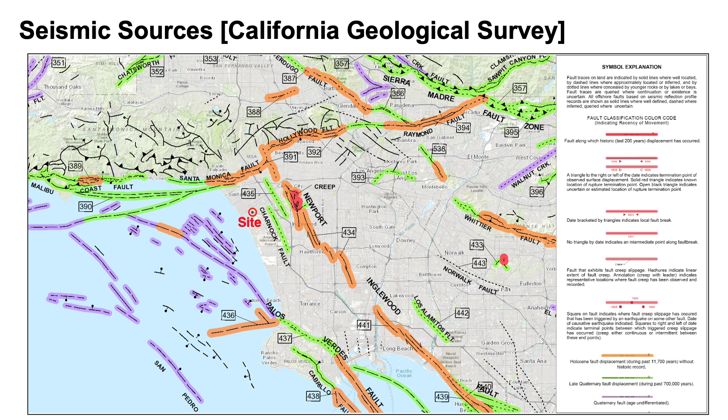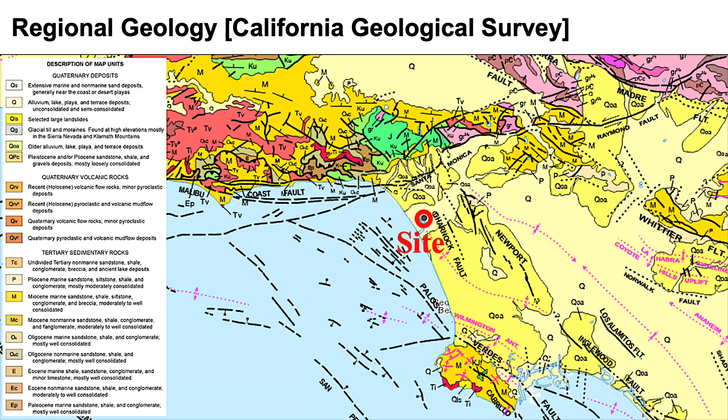This is the corresponding map of surface geologic units. The site is on Quaternary alluvium, that is to say recent soils. The groundwater table is about 20 feet below grade, but the building is supported on precast concrete driven piles. The green area around the site on the left shows that it is within a zone defined by the state of California in which liquefaction investigations are required for new construction.

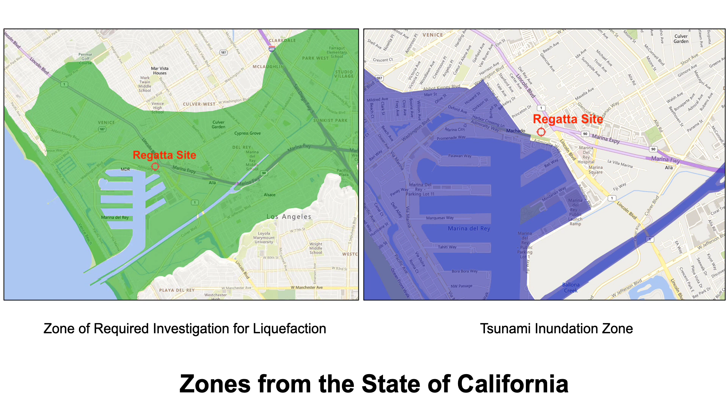Liquefaction is a soil failure in which sandy soils lose their strength when shaken strongly. The geotechnical investigation report from 1997 by the geotechnical firm Law Crandall would have identified liquefaction concerns, and that would explain the use of a pile foundation. The site is just outside of the inundation zone for tsunami, shown in the right in blue.

We use the U.S. Geological Survey to estimate the ground shaking hazards. They combine the magnitudes and probabilities for all of the possible future earthquakes based on the best current knowledge to predict levels of ground shaking for the site with its geologic conditions. Their modeling gives us a set of response spectra, as shown, where the intensity of ground shaking is given as an acceleration in G units as a function of the structural period of vibration and the recurrence interval.

We look at the ground motions basically having a 475-year recurrence interval. This is a common recurrence interval for risk or insurance corresponding to a 10% chance of exceedance in a 50-year exposure period. In other words, if I stand at the Regatta site for 50 years, the green line shows the level of shaking that won't be exceeded more than 10% of the time.

For an 18-story concrete moment frame building like this, the fundamental period of vibration is in the 2 to 2.6 second range, meaning that is the time needed to complete one vibration cycle.

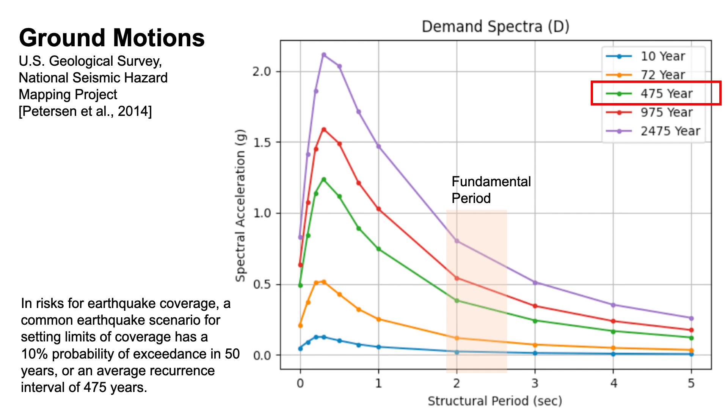This shows the structural plan of the building foundations on the left and the tower on the right. The blue tint indicates the footprint of the tower. The parking podium extends beyond the tower to the east and to the west. The foundation uses precast concrete driven piles grouped with large pile caps and linked together by tie beams.

On the right side, the red lines indicate where the reinforced concrete moment frames are located. The plan is not rectangular, so that complicates the earthquake design, requiring three-dimensional analysis. Fortunately, good tools for such analysis and design were available in the late 1990s.

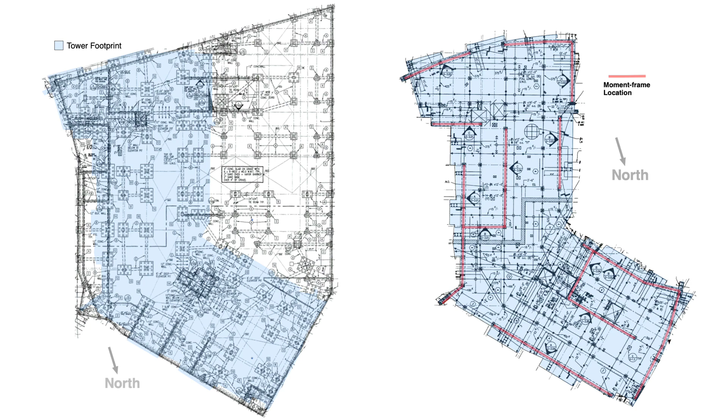On the left, we see the square piles with their reinforcement, the pile caps and tie beams, along with the slab on grade. On the right, we zoom in on a portion of the foundation plan to see pile groupings and tie beams. The system provides excellent support and mitigates the effects of liquefaction on the structure. The adjacent buildings, Cove and Azura, use thick reinforced concrete mat foundations, but this pile foundation may be a little better.

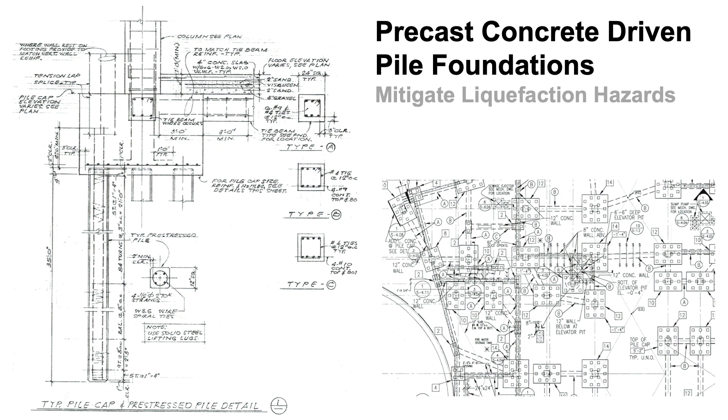On the left here, we show one of the reinforced concrete ductile moment frames stretching from the foundations all the way to the roof. We also see two seismic columns and a typical section through the post-tensioned reinforced concrete slabs used for the floors of the tower. Most frames are very regular, except, for instance, along line 17, where there's a step to accommodate ramps in the parking podium.

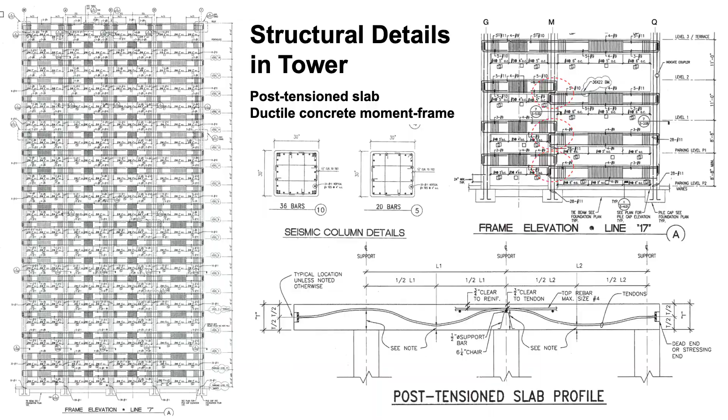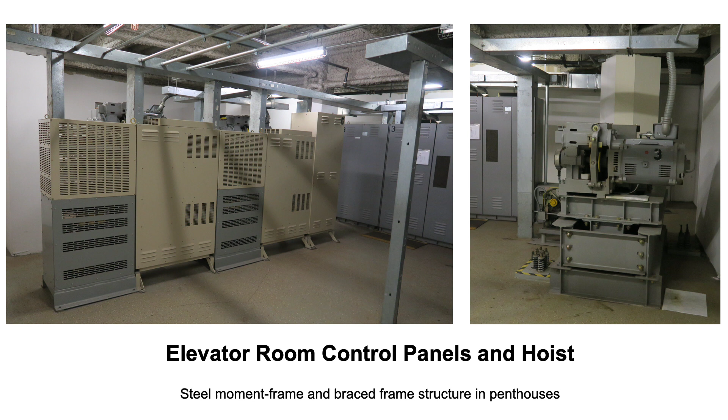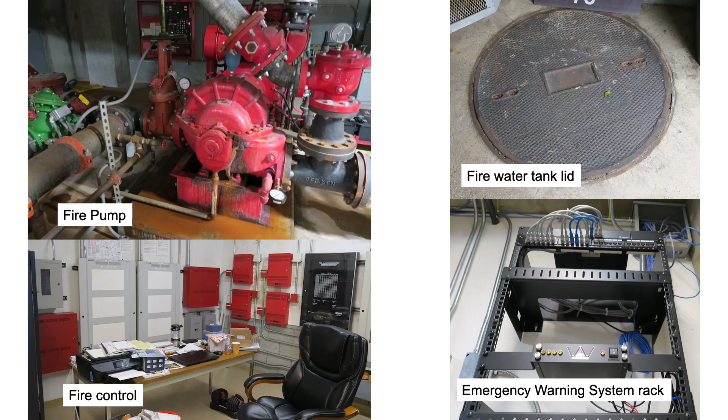The fire pump is anchored, and we see the fire control room. There's a large on-site tank storing firewater in case the city's pipelines are damaged, and you have an early warning system to provide you alerts when earthquake shaking may arrive. We note that the warning time for nearby events on the Newport Inglewood or on the Palos Verdes fault may be very, very short.

Some structural conclusions. The building has a good ductile, that means tough, structural system on a good foundation. It is well designed to recent codes and should provide good performance in future earthquakes, such as those anticipated in its design. Its performance should be similar to well-designed new buildings. Nevertheless, in large earthquakes, damage may occur.

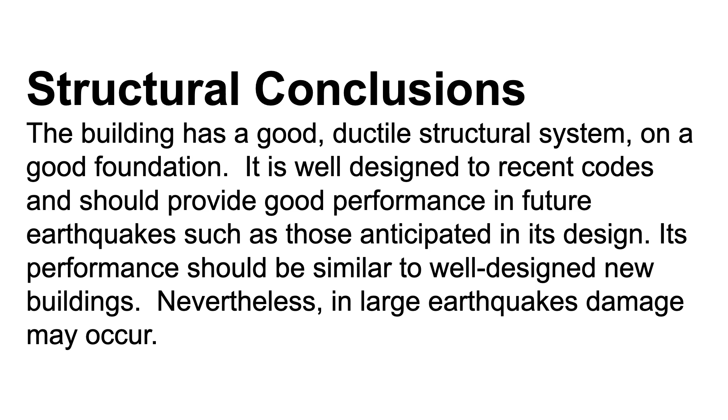Expected damage and effects. A likely scenario producing shaking, like the 475-year USGS level, might correspond to a magnitude 6.5 to magnitude 7 on the Newport Inglewood fault or the Santa Monica fault. Strong shaking might last for 30 seconds at ground level, although swaying may continue for more than a minute in the tower. Cracks would occur in drywall and in architectural ceilings, and some windows may break.

Contents and furniture would slide and tip. Tall furniture items may topple and fall. Fragile items not secured with plumber's putty or other means to braced shelves may slide and fall and break. The building may lose outside power and internet connections for days to a week or more. Cellular communications may be lost but should return within a shorter period of time.

Water and sewer system may be interrupted, in part due to liquefaction. Some damage may occur to building service equipment. Broken sprinkler lines or plumbing lines may cause some local flooding. Pool water would rise in large sloshing waves and slosh over the sides.

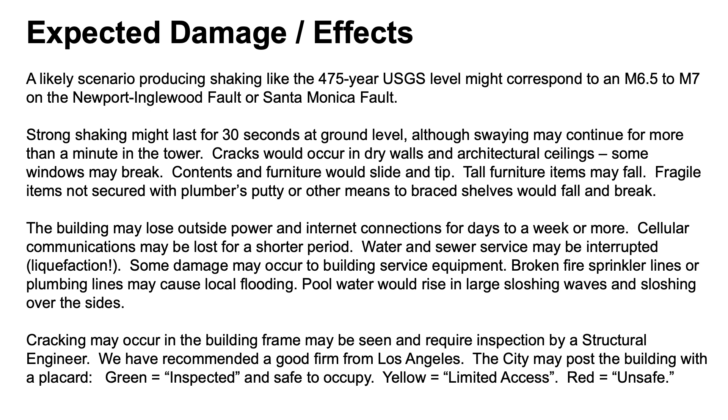Cracking may occur in the building frame and may be seen and require inspection by a structural engineer. We have recommended a good firm from Los Angeles. The city may post the building with placards, with green meaning inspected and therefore safe to occupy, yellow meaning limited access, and red meaning unsafe. Hopefully you get a green placard.

We estimated the financial risks to provide a basis for making decisions on earthquake insurance. For the 475-year earthquake, and based on a building replacement value of $240 million, which you provided, repair costs are expected to be about $29 million, or 12% of the building value. There are lots of uncertainties in play, so we estimate an upper bound to the losses may go as high as $46 million. This would not be exceeded 90% of the time.

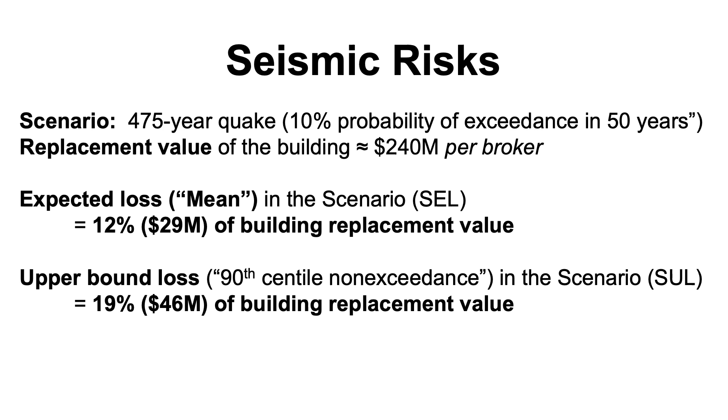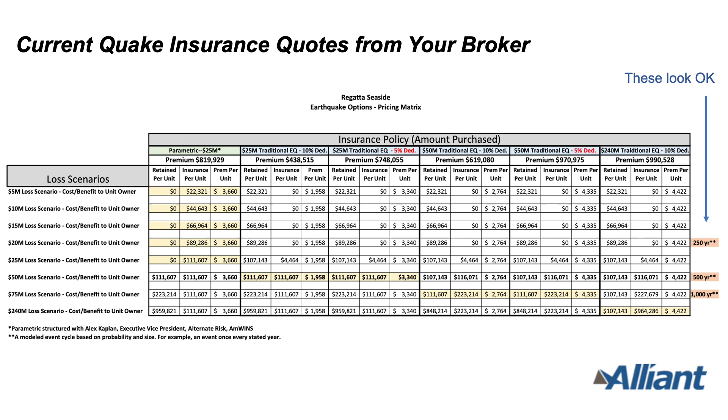Robert Sides worked with your insurance brokers and provided them information from our study. This helped them to adjust their risk models and update their policy offerings. Looking at earthquake insurance considerations, it's important to recognize that earthquake insurance is a risk-sharing mechanism. In conventional coverage, the insured party covers the deductible, that's 5 or 10% of the replacement value of the building. And then above that, the insurer steps in and covers losses up to the limit of the policy. Above that limit, the insured party again pays.

When selecting an earthquake limit that's less than 100% of the replacement value, we must consider the uncertainties. We've used a 500-year or 475-year scenario for ground shaking, and we've estimated scenario upper loss to provide a good level of conservatism, and this may be appropriate in selecting a limit. The scenario upper loss has a 90th percentile non-exceedance confidence level. Typical conventional earthquake policies may carry a deductible that's 5% or 10% of the building's replacement value.

The current replacement value for Regatta is $240 million per the HOA manager, so the SUL would then be about $46 million. With a 5% deductible in the 475-year ground motions for the scenario upper loss, earthquake coverage would then pay out 14% of the replacement value of the building, or about $34 million, and the building owners would be responsible for the deductible. That's 5% of the replacement value of the building, or $12 million. So 12 plus 34 equals 46. That makes up the SUL. For $50 million in coverage, a 5% deductible policy would be okay, and in this range. It looks to be perhaps a little expensive.

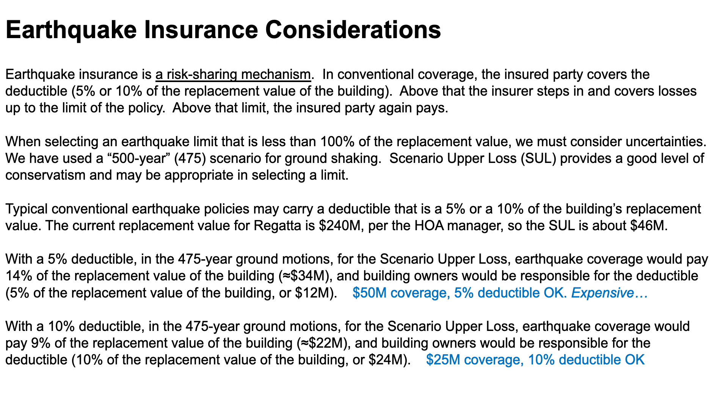With a 10% deductible in the 475-year ground motions for the scenario upper loss, earthquake coverage would pay 9% of the replacement value of the building, or about $22 million, and the building owners would be responsible for the deductible, that's 10% of the replacement value of the building, or $24 million. And so it would be about an even split on paying for the repair costs and the restoration of the building. So there's an option for $25 million in coverage with a 10% deductible, and that would be consistent with this scenario.

Earthquake Early Warning System. The United States Geological Survey, or USGS, in collaboration with state agencies, university partners, and private industry, is developing an earthquake early warning system for the west coast of the United States called ShakeAlert, and you all are participating in that program. The photo shows the unit in the fire control room.

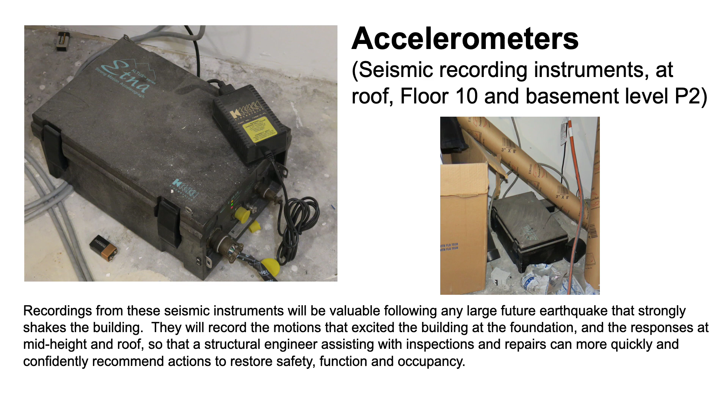We found seismic instruments in your building. These are located at the roof, at floor 10, and in the basement. These need to be serviced and maintained, and then they can provide valuable information after any large future earthquake to help engineers determine if the building is damaged and how much. Together with visual observations, these may help you get back into or even stay in the building after future earthquakes, or they can tell you if you need to evacuate. We have recommended a company to service and maintain these instruments for you.

These were the recommendations we made in August: rehabilitating the seismic instrumentation, scanning the architectural and structural drawings, and updating emergency response plans. We also recommended contacting a good structural engineering firm to respond after future large earthquakes, so you can get the help you need quickly rather than having to scramble to find someone when everyone else is also competing for these services.